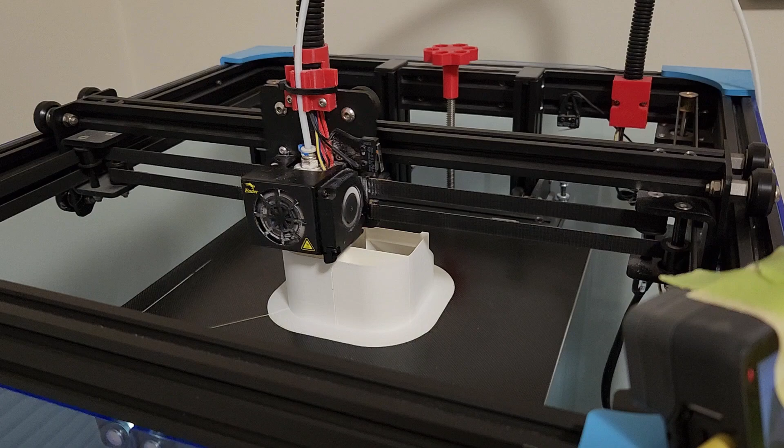Let's talk about surface mode and vase mode and how they work, and how you can use them to your advantage. In relation to the plane I'm currently building, my Ender 6 doesn't do surface mode because of the firmware on it, but I can still use it to get some good efficiency out of what I'm printing, and also to create strength in parts. I can also use it to avoid stringing.

What you find with vase mode is you don't get stringing, but you don't have to use vase mode to get rid of that stringing with lightweight PLA. And I'll show you why. Probably the easiest way to think about it is vase mode is like a slinky.

There's just one continuous print that has no stop and no end, so there's no Z seam on it. Basically, the printer starts in a spot, and as it's printing the item, it slowly goes up, so that when it gets to where it started, it's actually at the height to start the next layer. And it basically does that all the way through.

Now, that's great for a slinky or a vase, which is really nice and round, but how do we get some of that internal structure and things like that?

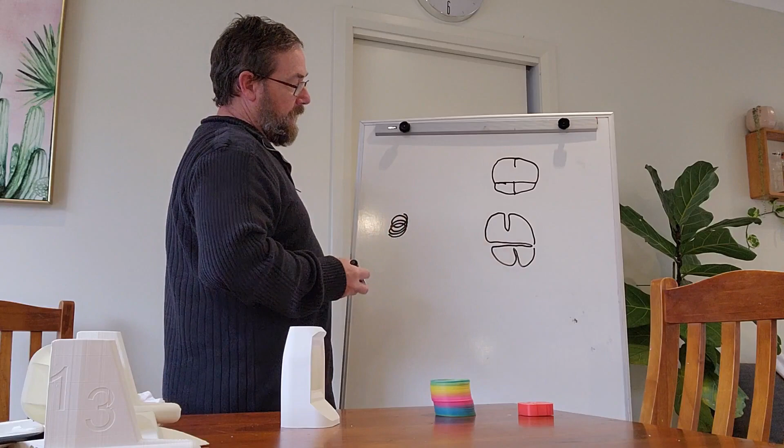Now you might say, well, how does vase mode do that? Because I can see that there are areas where, when the print head is running, at some point it's going to have to lift off and move to the other location. It's quite simple. Even though these bits look solid, even though it looks like one piece, it's not. It's actually two.

So when it's printed, it looks similar to this. When we talk about that vase mode where we're doing that continual slinky, that's basically how it's done. This piece here and that bit coming down, the bit coming up - terrible drawing by the way - there are actually two lines that aren't connected, and we use that to our advantage, so that what we end up with is that nice structure in the middle.

And even though in this print you can see, here's where I started and where I stopped, and at that point, if I'm doing vase mode, it will be high enough to start the next layer. This bit here, and this bit here, they don't actually touch the outer surface. And there's a reason for that - that's what makes it one single straight continuous line.

So another example would be if I was just basically to do a circle and I just wanted some structural integrity to it, I could do something like that. Once again, as you can see, it's a single line. And these bits here that are giving me my strength, they're two lines, but they're printed so close together that when they're printed, they come out as a single line.

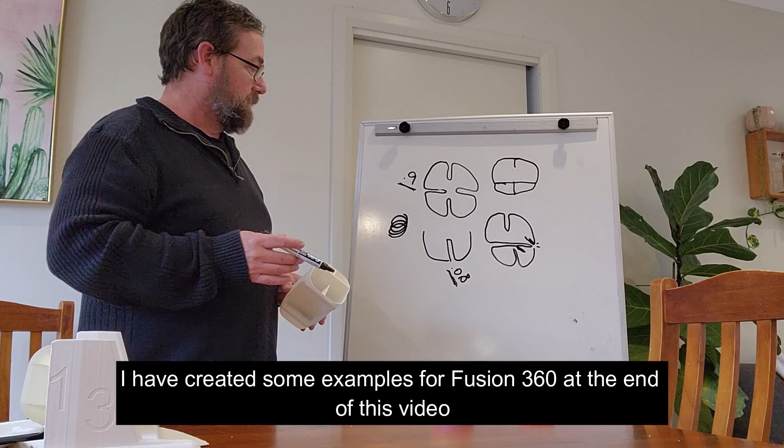Now I know what you're thinking. Why is it that when I print this line, even though it's two lines, it becomes a single line at 0.08, and where I have structures that are meeting each other, it's 0.9 and they basically join together? I don't know. It's one of the amazing things about 3D printing. Anyway, so there's a basic overview of how it works.

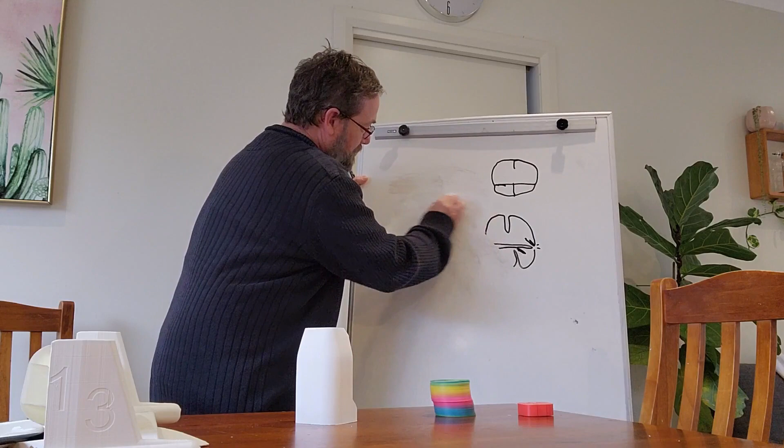And you might think, well, how do I do that? Some of this is quite simple, and when you start playing around with it, you'll come up with ideas. So what I generally do is I don't start off with trying to create a surface, because that'd be quite hard - straight away I'm talking about, in Fusion 360, creating a surface as opposed to creating a body. I don't try to create a surface because that would be really hard to do.

I could create a body and then remove those other surfaces, but I would still have had to go through the process I'm just about to show you to get these internal structures. So basically what I do, I'll make it a space.

Oh, that's rubbing off well. Yeah, anyway, second time's a charm.

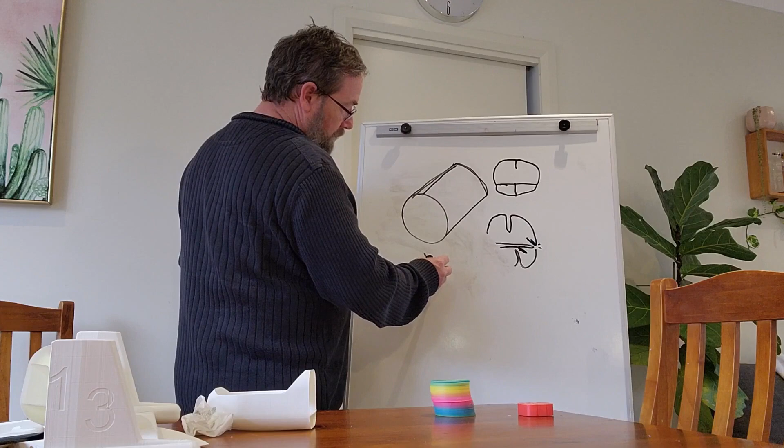So what I'll do is draw this in a three-dimensional view. I'll create a cylinder. So that's my cylinder - messed that up a bit, didn't I?

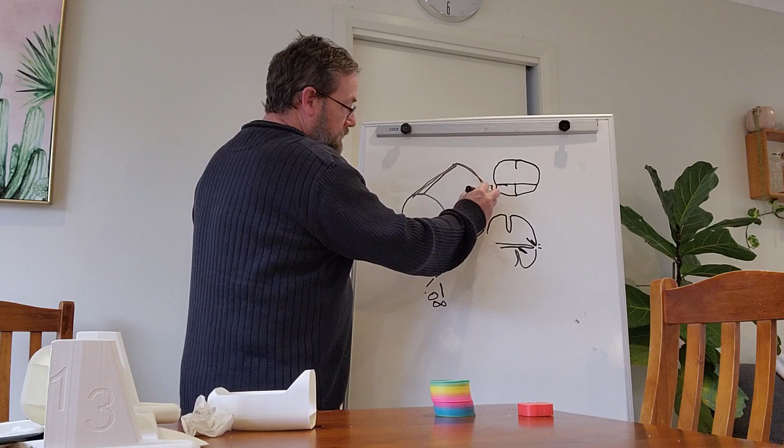Just like I did with this one, if I want to put something running through the center, I'll create another body that runs the full length since I want to cut the full length. I'll make it longer than the object because I'm going to split body it. The length and height are relative to how far I want to cut into the object, but I'll make it 0.08 thick.

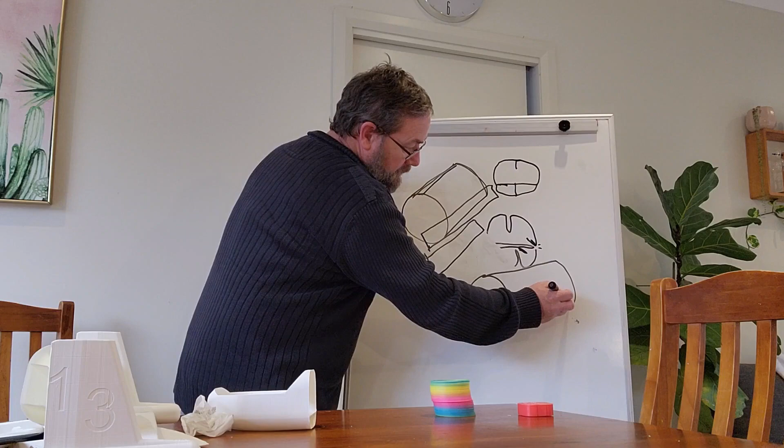So then I move this piece up into this piece so the two intersect, and then do a split body - the cylinder is the body to split, and this is my splitting tool. What I end up with is a cylinder, and if I draw the internal of it, it now has that cut all the way through.

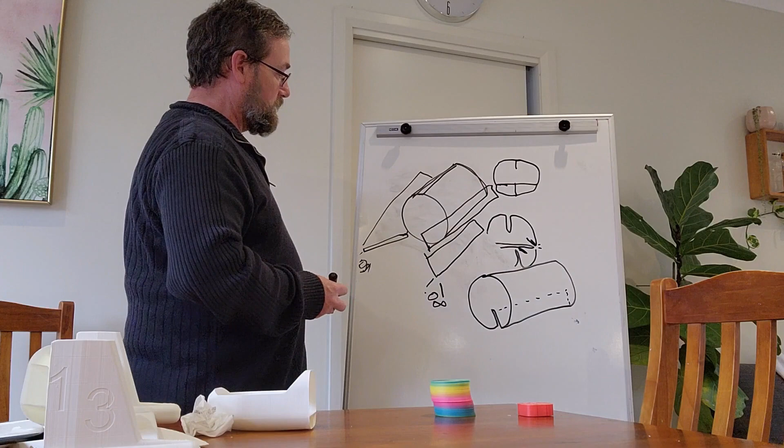So when you throw that into your slicer and slice it, then drag down through the layers, you'll see that it actually comes in, and you've now got that structure.

If I want to do what I did with the other one, where I had one coming across, I'd do the same thing. Once again, I'd create another body, as long as it needs to be, and 0.08 thick. Then I'd slide the body into this one so it comes all the way across over the top, because what I want to end up with is basically that.

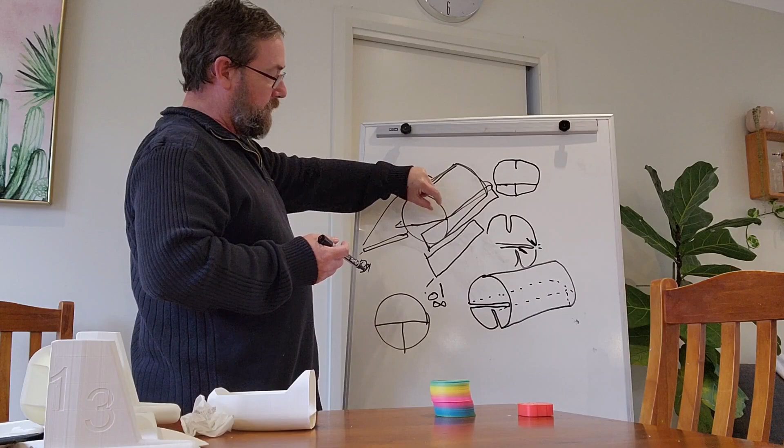So I would slide this in, and once again do my split body - this is my target, that's my tool. What I end up with, coming in from this side, would be that, and once again the internal view would look like that.

Now remember, when I slide this body in to split it, I need to make sure it doesn't go all the way through the body - otherwise I'll split it in half and end up with two. I want to leave a 0.09 mil gap from the end, so there's a 0.09 millimeter gap between this body and the outer of that body.

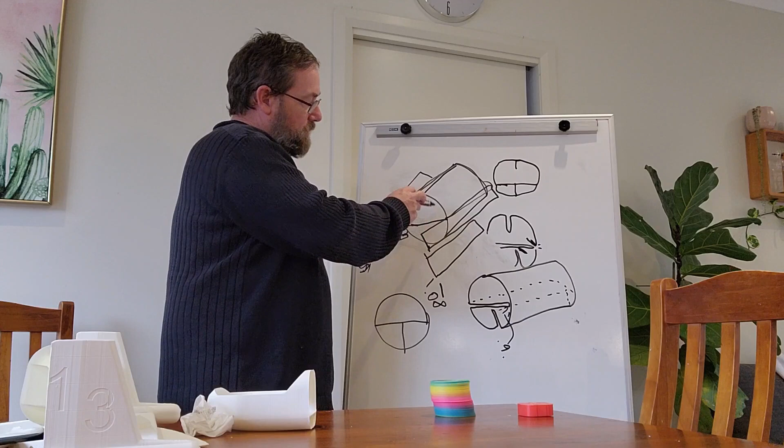If you play around with it, it becomes quite easy. Just start using your measuring tool and measure from a point on this to the other side. Eventually you'll sort it out.

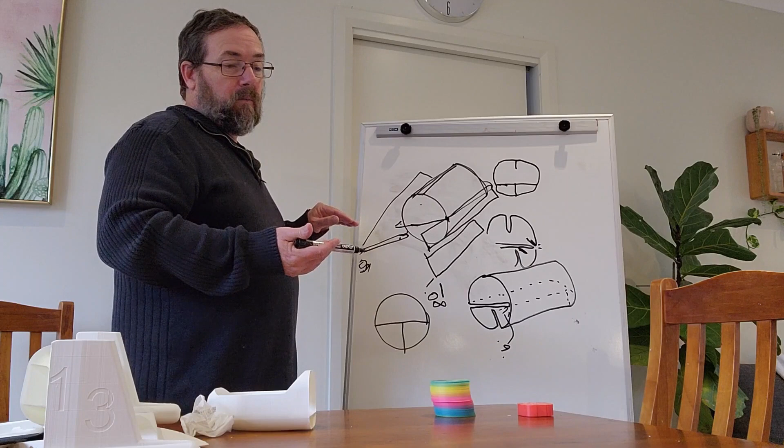One thing I found was that sometimes when you measure things, because you want this body to extrude past this face, the distance isn't actually relative to how far that line is from the outer circle. So on occasion, especially where I've got a line that isn't straight, I'll line up the edge of this with the edge of that.

Then I'll do a move - moving this back this way, and using the indicator in the move tool, it'll tell me how far away I am. I could also just punch in 0.09 to move it that far away. So there's a couple of ways to do it.

Anyway, have a bit of a play, have a bit of fun with it, and you'll find that you can actually create some really cool shapes. This is kind of the first time I did it.

And I did a couple of things. You can see I've done that bit there with the two join. I've got a couple of little bits down the back here which are going to help the motor mount. And there are a couple of spots where, and this is where you need to think ahead in your design, that's a big part about this, thinking ahead in your design.

There are a couple of spots where internally, so this piece is printed like that, there were some components that I didn't want to start until after. So rather than having a square edge on the end of it, which wouldn't print well, I put it on an angle.

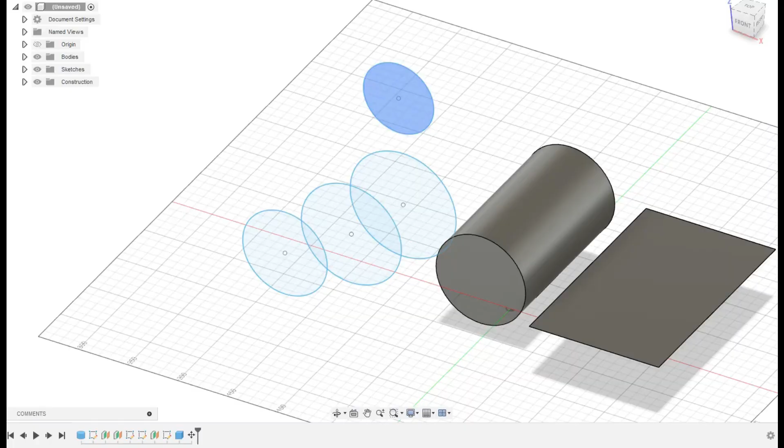A way to tell that you've got this right is that you're not getting a lot of stringing. If you're getting a lot of stringing, you haven't done it right. You should go back and look at your slicer, and your slicer will tell you what you're doing wrong. An easy way to check is turn off vase mode or surface mode, and you'll see more than one Z seam spot, one spot where it's jumping around, and that might be because the way you've designed it isn't quite compliant with the way it needs to work.

So what I mean is, it might get itself into a corner and have no other option but to lift and move to another spot to start again. So keep that in mind as well.

But you can tell straight away, because especially with the lightweight PLA, you'll just start getting a little bit of that stringing back and forth from somewhere. I know I got a little bit of that with my ailerons and stuff, but it was all internal, so to be honest, I really don't care.

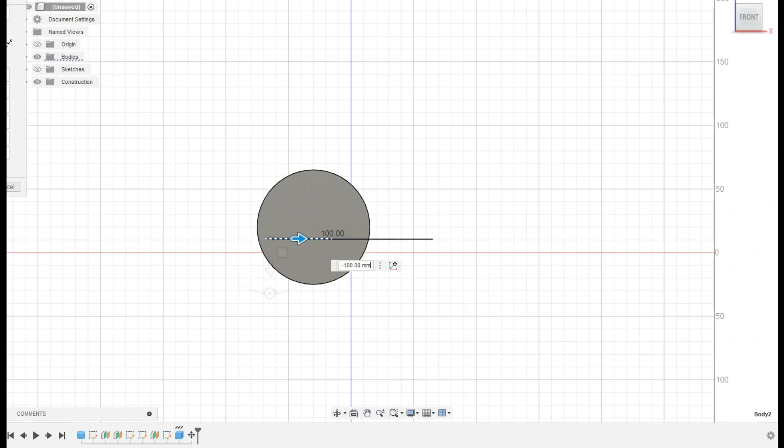Okay, so I've created myself a cylinder, let's just pretend that's a fuselage. Let's just get rid of these sketches for the moment. So let's just pretend that's my fuselage, and I've got my cutting piece here. As we can see with this cutting piece, it's very thin, so it's that 0.08 that I was talking about.

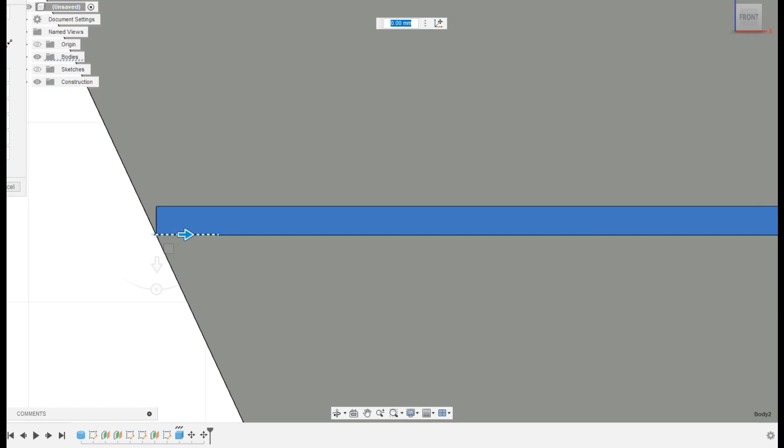And what I want to do is basically put a platform through this structure. So what I do is I just line it up nicely, and I'm going to move this guy, bring him down a little bit. And what I want to do, this is one way to do it, is line it up as close as I can to the edge.

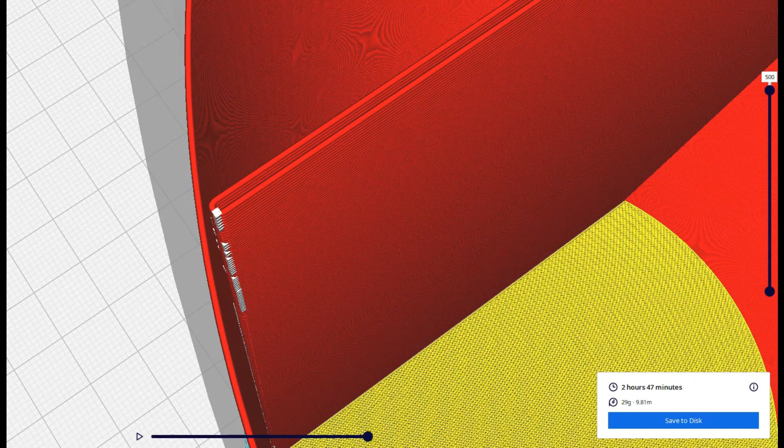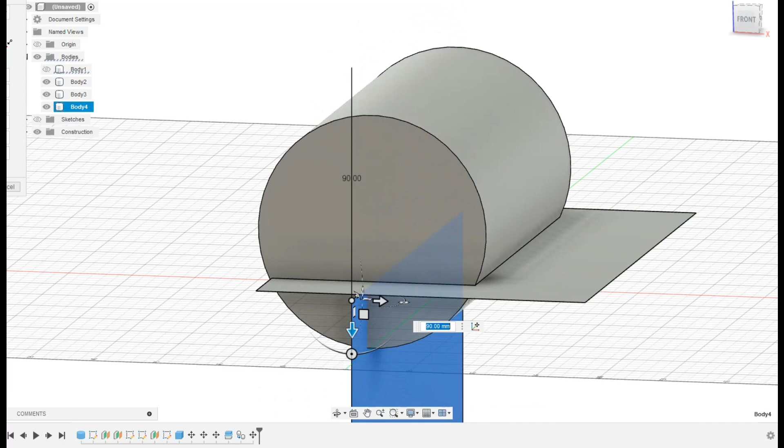Okay, so that's completed my move, and now I need to have a gap, and that gap needs to be that 0.9 I was talking about. So let's do another move on the same object, and I'm going to move it that 0.9. There's a couple ways I can do it - I can just drag it till it gets there, or I can just enter it once I know which axis it's on. So there we go. Now I've got this bit of a gap here, and you can see it doesn't come through the other side, so that's pretty cool.

All I'm going to do now is a split body. So this is my body to split, and what I normally do - I've seen some weird issues sometimes where when I select something, it's selecting the face and not the actual body. So what I normally do is expand my bodies, work out which body it is, so it's body 3. My splitting tool is body 4, so it's selected the whole body and not just the face, and then I just OK that.

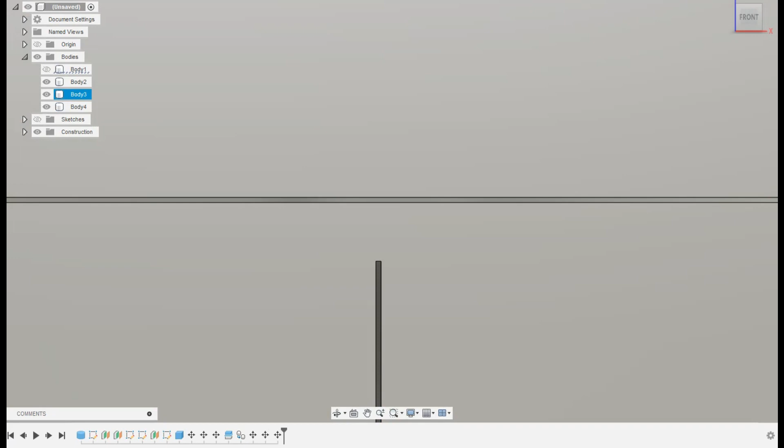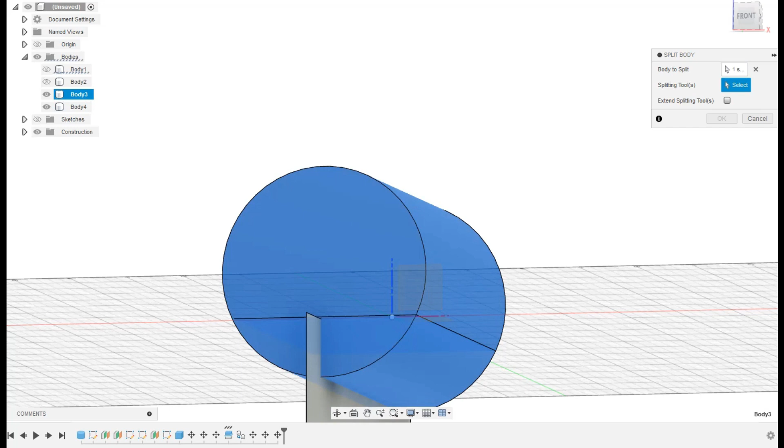If I just hide this guy, you can see that I've now split that, and that's this guy here. So if I get rid of that little sliver, you can now see that I've actually cut all the way across that. So if I just throw this out to print, this guy, okay.

Okay, so when we look at our preview - I don't know if I put, yeah this one's got top layers - and we slide down through it, what we can see is that it's not touching this side, but when it prints that, it'll print close enough that those sides will actually be joined, and on this side we actually have, as you can see, we've got the gap.

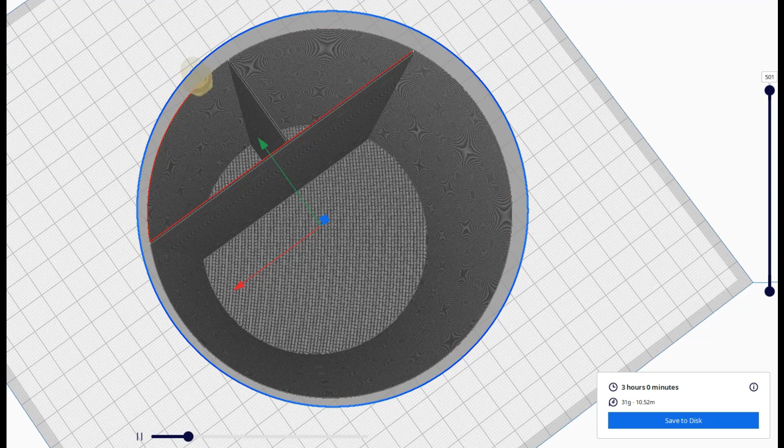Righto, let's jump back here. Let's turn on my slicing object. So if I wanted to come up from the bottom, I can just use the exact same object. So if I select this guy, I could actually even just take a copy of him and just move him down a bit. And obviously I want to rotate him because it's on a different plane. Just going to leave him there for a sec. I'm just going to grab him from the top, make it a bit easier.

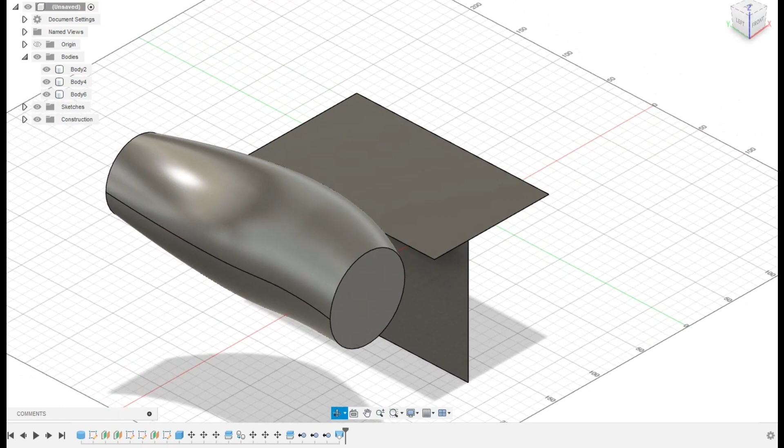So once again, I do pretty much exactly the same thing. What I want is I need this guy to be that 0.9 away from the other guy. So if I line this up, so he's basically touching him. I don't know if I'm in the center of the object or not, doesn't really matter for this demonstration. It's pretty close. So if I line him up like that, so he's pretty much spot on, and then I do another move just to move at that 0.9. It's zoomed in pretty close, so I'll just drop a 9 in there, and he's now that 0.9 away.

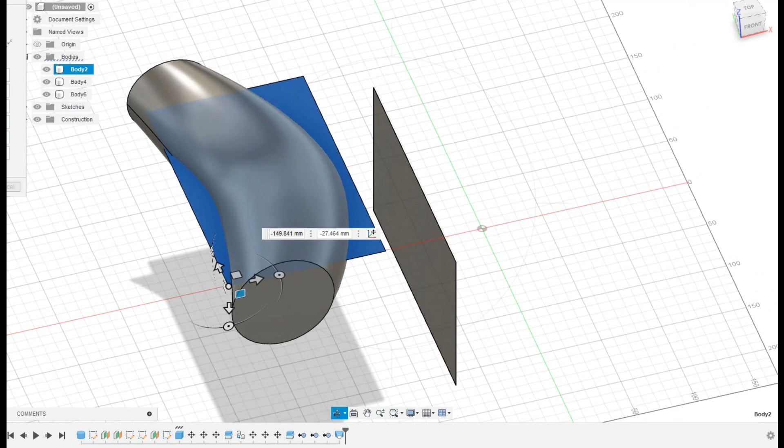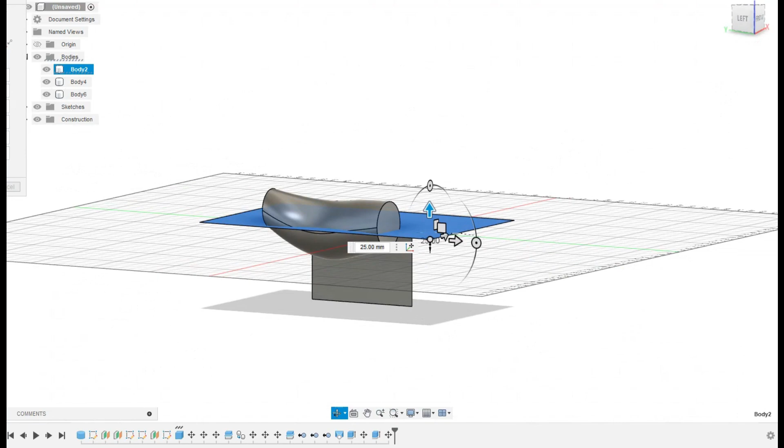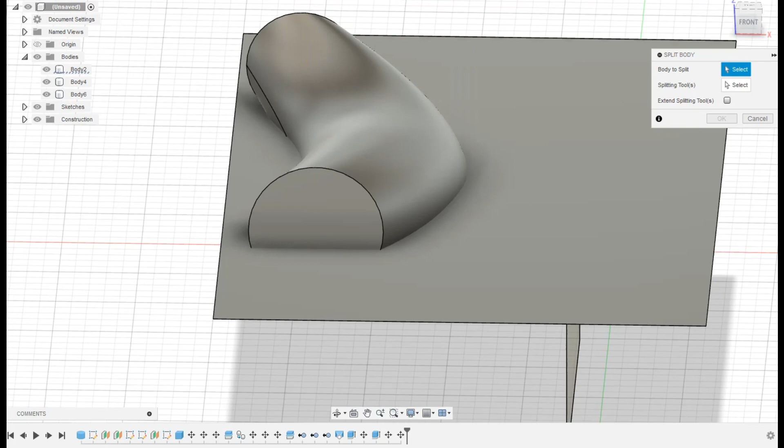So let's save this guy out. Right, so once again, we've got the gap down the bottom, but it doesn't actually touch here. It's close, but not quite. And when we look at it, and we check how it's going to print that, you'll notice that it conforms with what we need for vase mode, because it's just one single continuous line throughout the whole of the layer, and therefore you can print in vase mode or surface mode. One of the benefits of that is that you won't have that Z-seam.

You also won't get stringing, so see that it started from the same place it left off. And if I go up or down a couple of layers, doesn't make any difference, because it's pretty much the same object shape all the way up. So yeah, if it does it on one layer, it's going to do it on all of them.

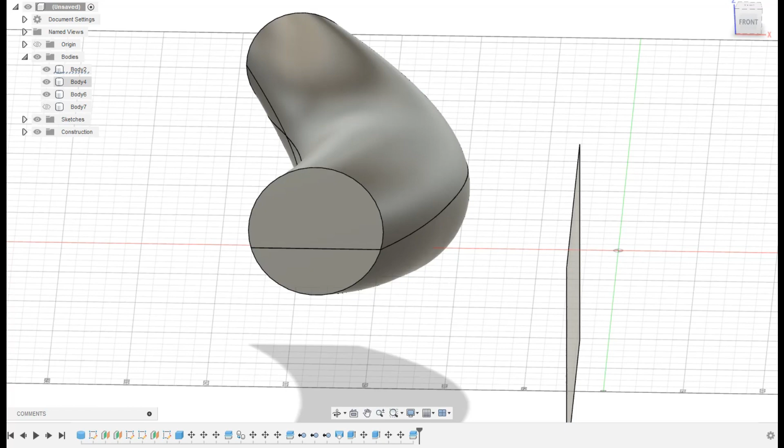Okay, so I'm going to try slicing something which doesn't have a uniform shape like the last one, because that had a uniform shape, it was really easy to do. You know, it was all perfectly symmetrical, so I could just jam the wedge in there like I did and cut it, and I know that it's aligned front to rear of the object, so that's not a problem.

So let's turn these sketches back on, and what I'm going to do is I'm just going to loft that so that we have a really unusual looking shape, which, using a rectangular piece is obviously going to cut all the way through it if I try and put that through.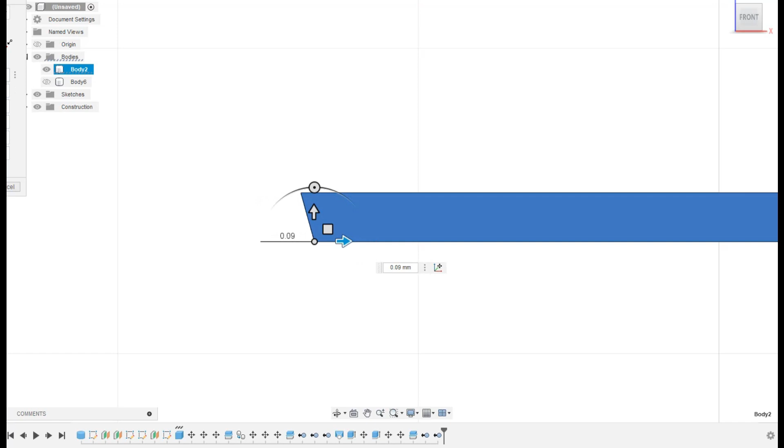And what I mean by that is if I grab this guy and I put him into the object, he is going to come out in some places, but not others, so the distance is unequal. So what I want to do is extend that object for starters so that it goes the full length of this object. So let's just pull him out.

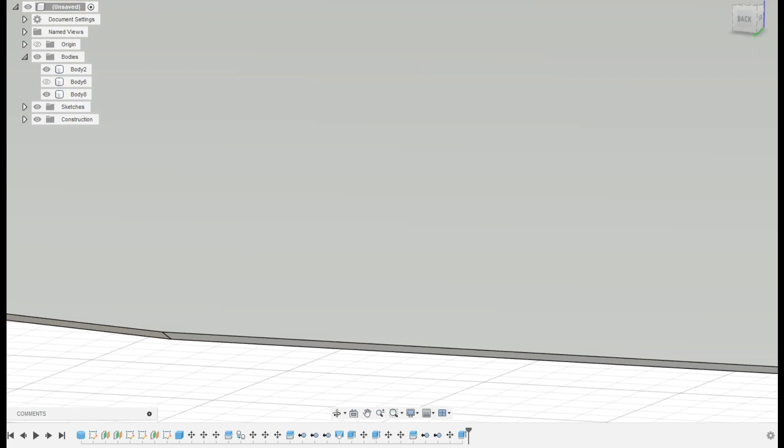Just cancel that. I'm going to zoom in on him, and I'm going to see if I can extrude this edge. Sometimes it works, sometimes it doesn't. Yep, cool, he's happy for me to do that. Extrude can really play up sometimes.

So I'm going to do basically the same thing, but on this edge if it lets me as well. Yeah, cool. So I'm going to pull that out a bit. I always end up doing more than I think I need because it just makes it easier. Means I don't have to do it twice.

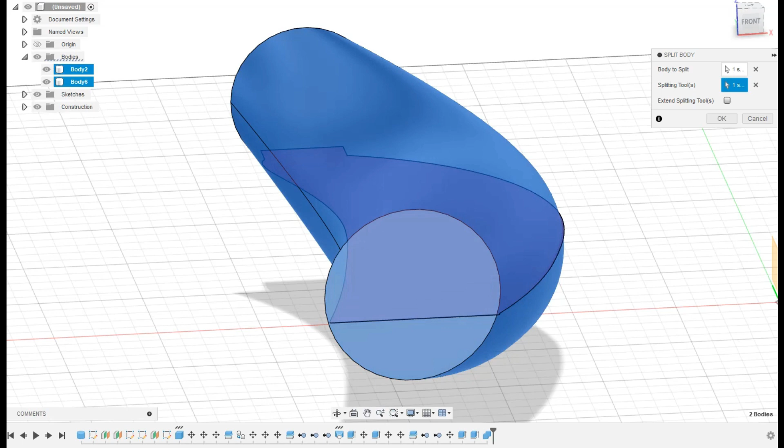Righto, so we've got this really big cutting surface now. So let's just go back to that top view again. And what I want to do is move this object into that object like I'm going to cut it. But as you can see, just because it isn't a uniform shape, it's just not going to work.

So what I need to do, let's just jump around to the front. Might just bring that up a little bit just so it's... Let's have a look at that. How's that look? Yeah, it's going to be more uniform in there.

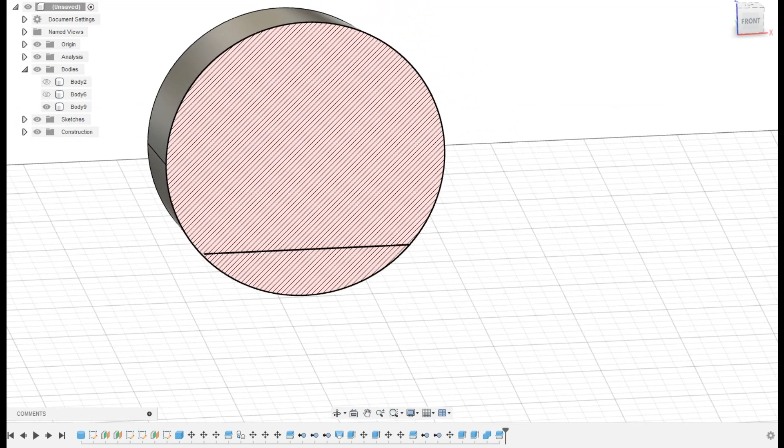So the question is, how can we get this to work? Well, I think it's quite easy. We'll give it a crack. So what I'm going to do is, the first thing I'm going to do is I'm going to do a split body.

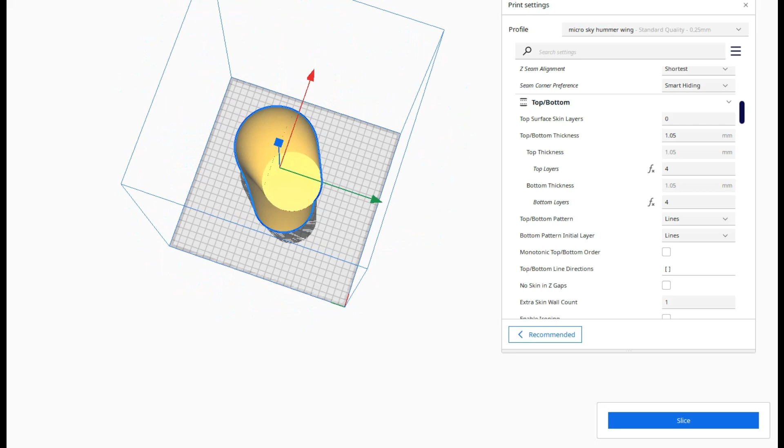So the body to split is actually my plane this time around. So body 2, and my splitting tool is going to be body 6. Okay, so when I do that, I'm going to end up with a couple of pieces.

So now I've got the outside piece, this piece, and there's an inside piece that you can't see at the moment. So if we get rid of that, see this piece here? So let's hide this guy because I don't need him anymore. So I've got that guy and I want this guy.

And as you can see, that line runs perfectly down the edge there. So what I want to do, I'm going to get rid of this guy as well, so I don't need him at the moment. So I've got this guy and that guy.

Get rid of that guy. I just want to clean it up a bit so we know exactly what we've got and what we don't. Alright, cool. So I'm going to come to the front and I am going to just hide this object for a second. And what I want to do is exactly the same as what I've been doing with everything else.

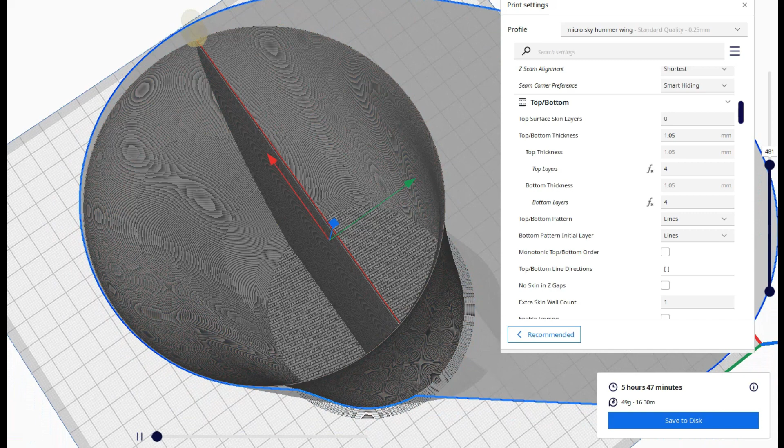Look at that, it's even giving me a nice little chamfer on the edge. So I'm going to select this guy to move him, and I'm going to move him by 0.09. Okay, so I've moved him 0.09 to the right.

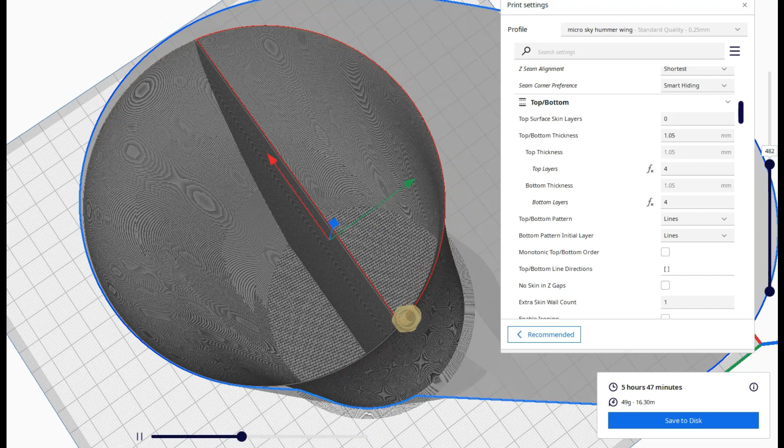So when I turn my other body on, he is no longer protruding out the left-hand side. But he is on the right.

Now, one other thing that I'm going to do, just to make sure that this works correctly, is I am going to see if I can extrude this edge, because I want to make sure that it extends past. Yeah, you got a little bit of angle on there, but yeah, that'll work.

It's both sides. Yeah, you can see over here, it's not really poking out. It's pretty close.

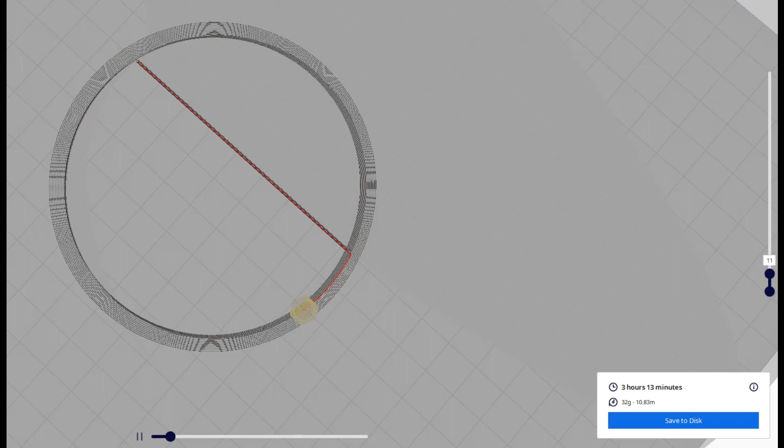I'm just going to make that a new body for a second. Yeah, there you go. Now that I've done that, it's happier. So let's just get rid of this guy for a sec.

And I want to do the same here. I just want to extrude this edge, which is extruding the way it was cut along that face. That's why it doesn't look parallel, but yeah. So I'm going to join that. I'm just going to...

So I didn't actually join this one, but I will now. I'm just going to do a combine between this guy and that guy.

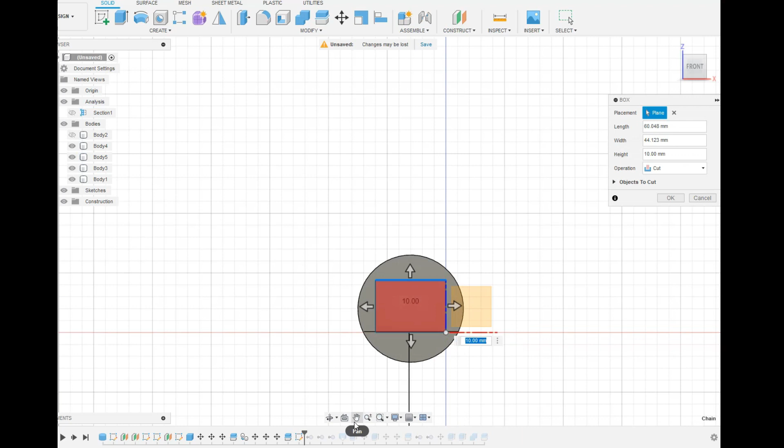So they're cool. Now when I look at it, it's sticking out one end, one side, and the other end. So if I come and do a split body on this, I'm basically going to end up with the exact same scenario as before, even though it's not a straight line, because I've made the line match what the actual object was.

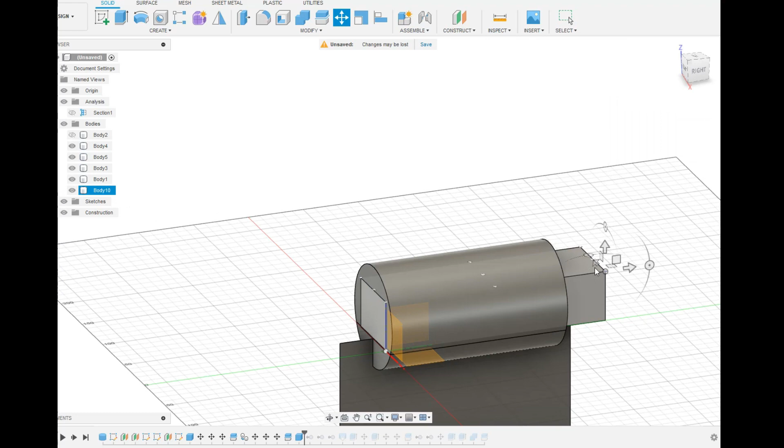Who is who in the zoo? That's cool. So we've now got that slice all the way through it.

So another way you can actually look at this sort of stuff is if you come down to your select section analysis and you click on a face, and then you can drag the arrow through the body, and it'll actually show you the internal structure. As you can see, it maintains that distance from here to there.

If you've ever done an analysis and clicked off and gone, hold on a second, I've just lost all my drawing and stuff because I left the cursor partway through, you can actually just come up to the analysis section and turn that analysis off.

So I now get to see everything that was going on. I'll do the same with this one. I will just throw it in the slicer.

As you can see, it's a fairly simple task to do. It does require, though, often that you think ahead a bit.

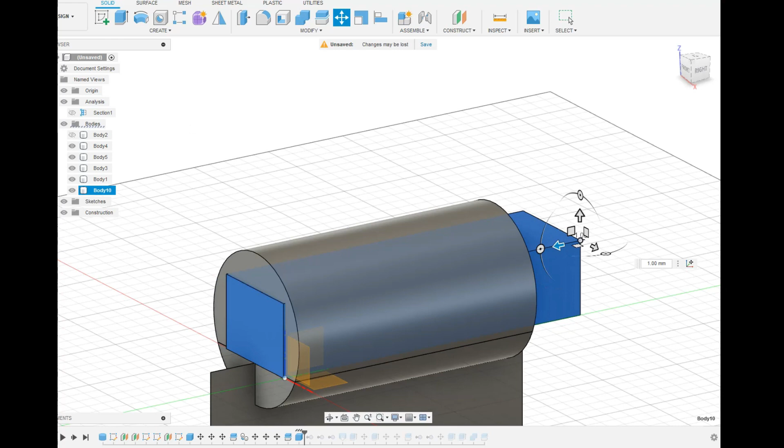And I prefer this method to using a surface as opposed to a body, because I can go back and fix mistakes in this quite easily.

If I'm going to try and create a surface in a similar fashion, I'm going to have to draw those lines out. I'm going to need to make sure that the gaps are right, and the issue becomes that all of a sudden I'm concentrating more on getting that internal structure right as opposed to the outer shape that I'm trying to create, because I need to think about everything well in advance.

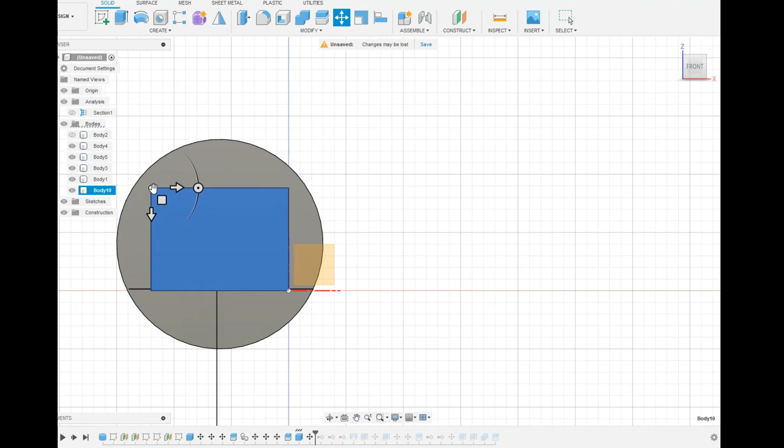As opposed to just thinking about it beforehand, you can normally just make a general shape like I did, and once you're happy with your shape, you can then just do your cuts in that shape, and then you end up with something like this guy.

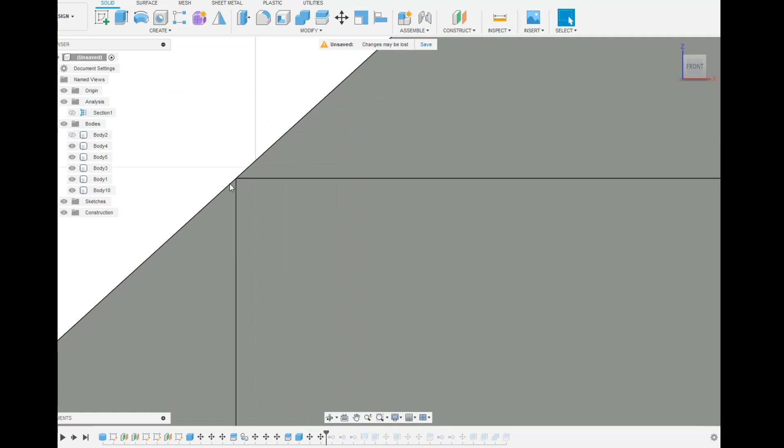So once again, if we just drag down through that, we can see that he is not touching on this side. There's a Z-seam there. And we can see on the other side that it's open.

So once again, if we just run our print layer preview, it'll just run around and have a bit of a look. And yeah, as you can see, it's good to go.

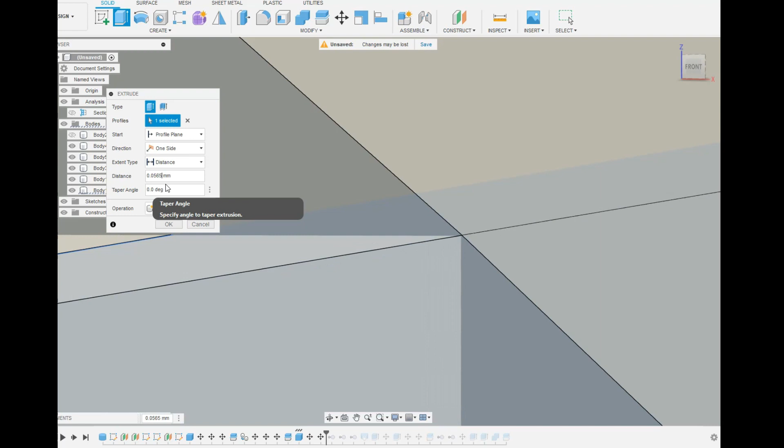So I've just thrown the object back into Cura and resliced it without top or bottom layers. One distinct difference that you'll notice is that I no longer have that second wall, which you wouldn't have if you're doing vase mode.

And as you can see, if we just do our print preview, it's really straightforward. I think one thing worth mentioning is that there isn't a lot of structural support in this. There is a bit across that section where it travels all the way across, and it'll be really strong through there, but it won't be strong in other areas.

So this is kind of where you need to think, well, what can I do to make it more structurally sound using this type of method? So there's a few things that can be done.

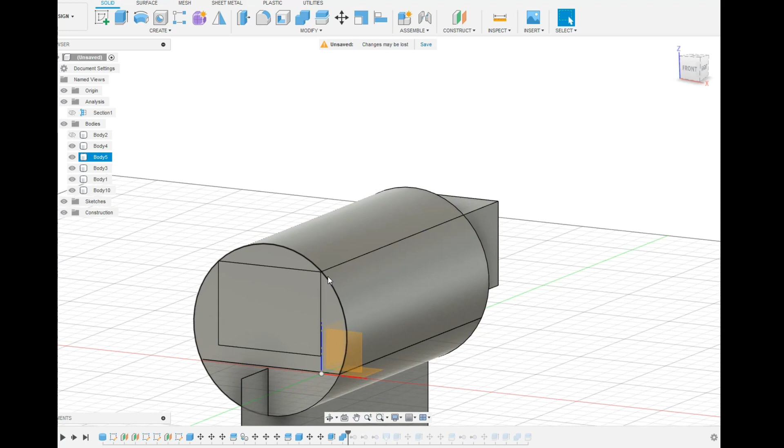Let's just stop that. And if we just scroll up through that, as you can see, it's got a nice uniform distance, and at no point does it actually touch.

So I'll throw that on the printer and I'll print that out as well, and I'll show you what that looks like afterwards.

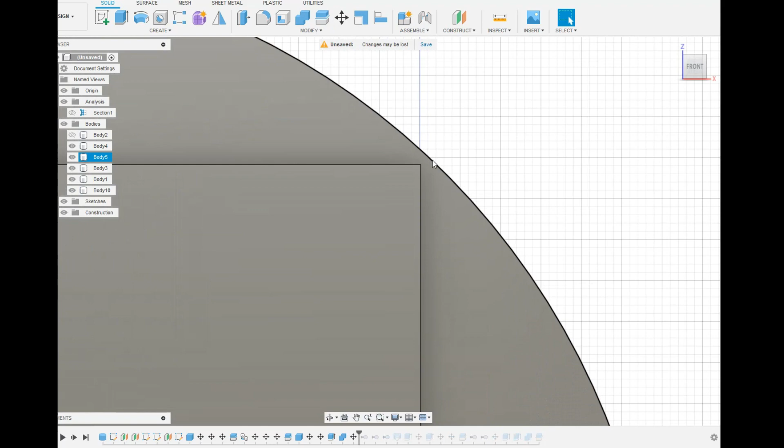Okay, I'm just going to roll back to the other object that we created. And what I want to do is I want to create something that's a little bit more structural. Like at the moment, this isn't too bad.

It creates some really nice solid areas to the base here, but up the top it's still very soft, remembering that this is thin wall print.

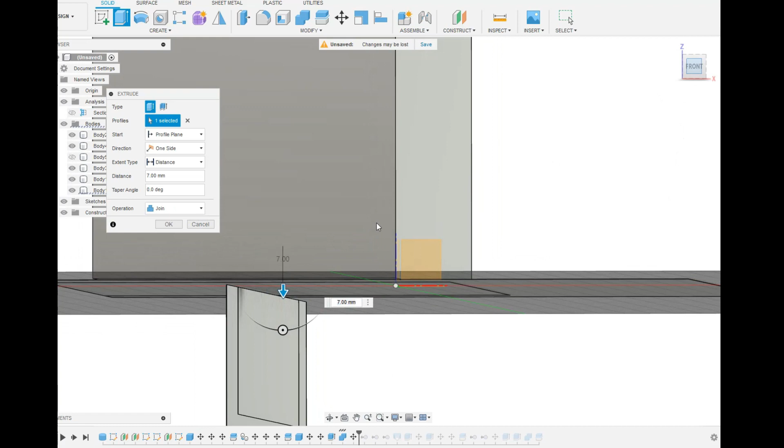So what I'm going to do, I'm going to start by creating a box, and I want it on this plane, and I want it to basically fit inside the existing. Got a bit of snap to going on there.

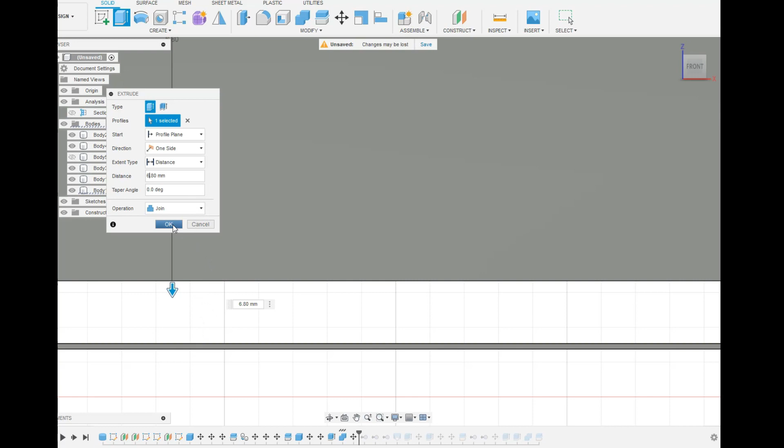I want to create a new body because I don't want to cut it yet. And I want that to run. I'm going to make it full length.

Okay, so I have my new body, and I just want to cancel that for a sec.

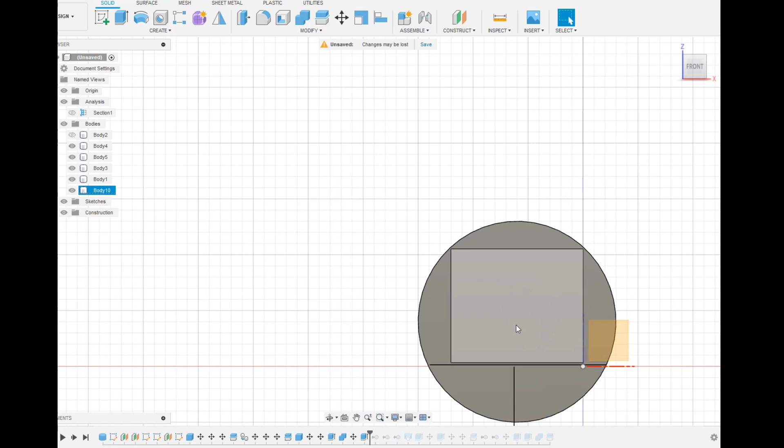So I've got my new body, and basically what I want to do is create an area whereby this body provides an internal compartment, but I want to do it the same method that I did those other things.

So it sounds like it could be quite tricky, but what we'll do is we'll just center it up, and then we will take care of the harder bit, which is just going to be aligning it so that we've got that 0.9mm gap to everything. And then I'm basically going to add one of these wedges on top of it so that it slices through the top of the structure. You'll see what I mean in a minute.

It sounds kind of complex. You can make it harder than it needs to be. I'm going to try to make it fairly simple, but we'll see how we go.

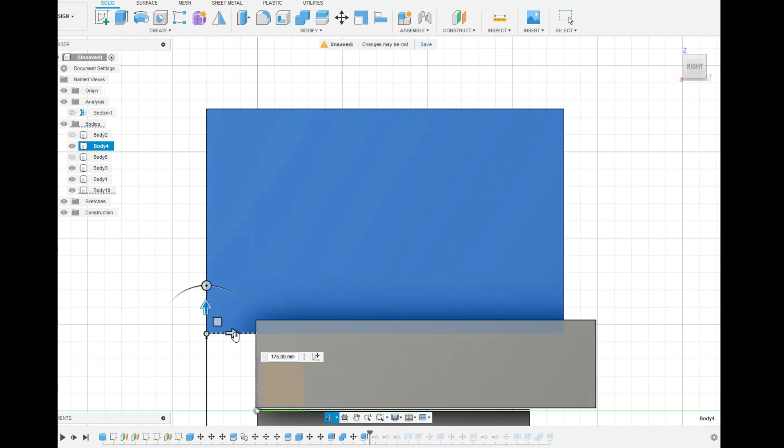Okay, so the first thing I want to do is pull that body all the way through. I'm just going to move it forward a bit because it's not quite protruding all the way through, and that will probably make it a bit easier to see what's going on. I just want 1 mil, I just want it to be coming through.

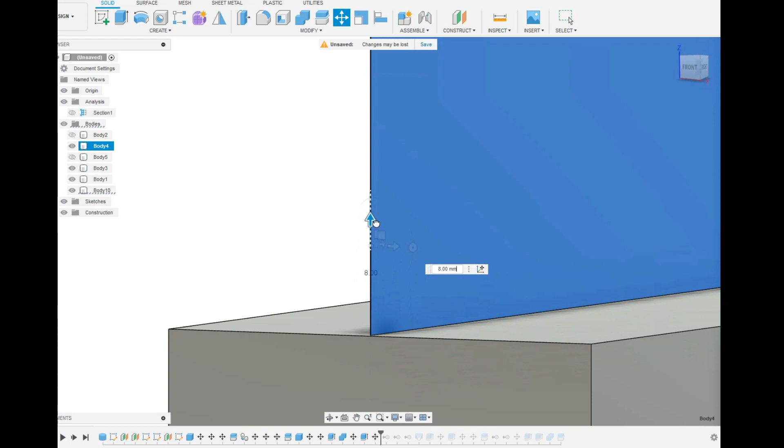Oh, I hate that. Righto, so let's just get a front-on view. So what I want to do is align—let's do another move.

Body to move is this guy. I want to align him at the top corners. And that was a massive fail.

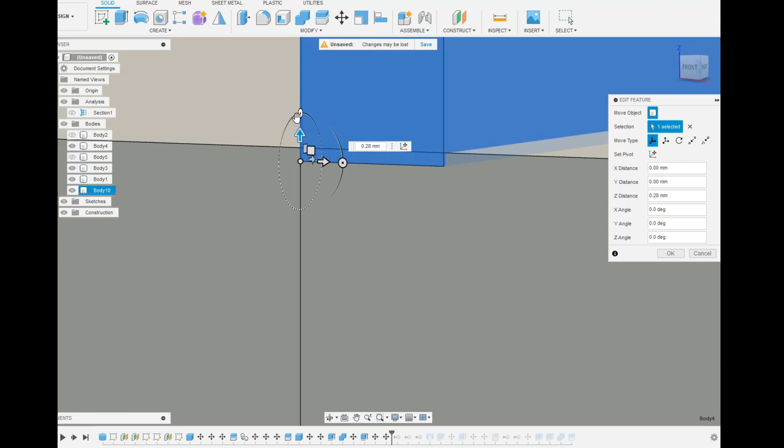Scroll around a bit. So I'm just going to line up one side and then I'm going to see what it's like on the other, because from what I can tell—this will all make sense in a minute.

Okay, yeah, that's pretty good. And if I come look at the other side, ooh, I'm out just a little bit.

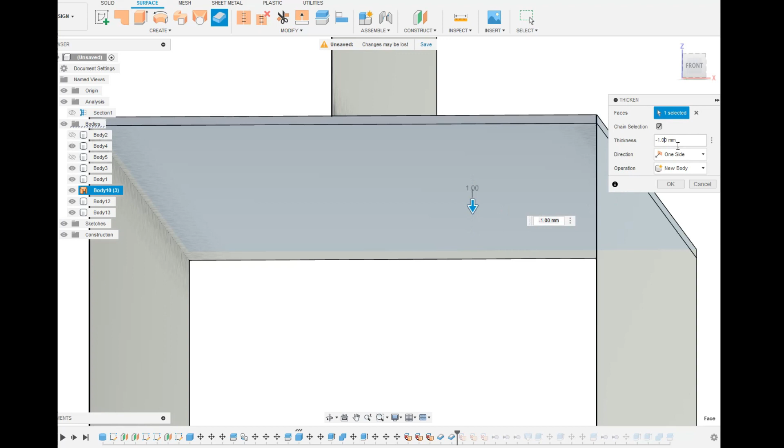So what I want to do is extrude this side rather than move it, because as soon as I start moving it, I'll be pushing and pulling and mess up the other side, which is pretty close. So if I just do an extrude on this side and bring it out to the line, and I want to go a new body so that I'm not...

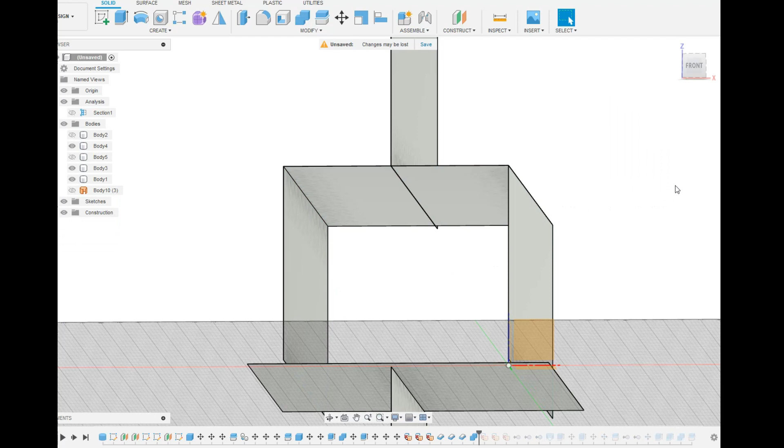What's that distance? That's 0.5. Let's go 0.55. Oh, it's close. 6, 7. Let's go 6, 5. Yep, that looks pretty good. Okay, so that's a new body.

I'll need to join the two bodies at some point, but that's looking pretty good. If I just jump back over to the other side—yeah, yeah, that one's looking pretty good. I don't think I'm going to get it much better than that, eyeballing it.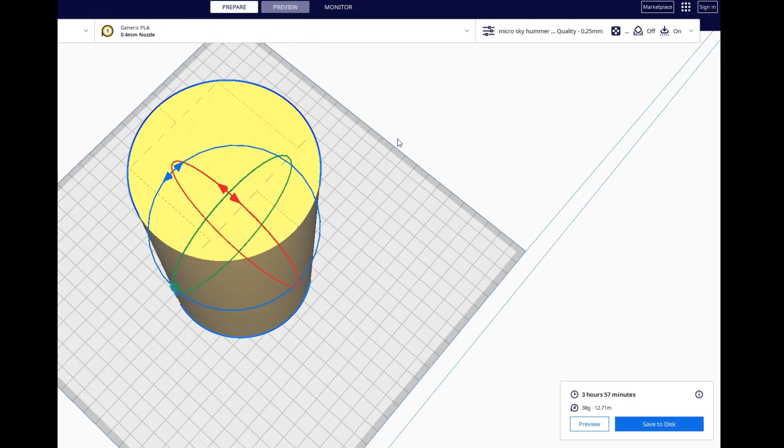Okay, so the top two sides are aligned fairly well, so I'm happy with that. And I just need to join these other components.

So if I just hide this guy, and I just want to combine this guy and this guy, good to go. There are no other objects around that I'm cutting into or anything crazy.

Alright, I'm going to turn that body back on. Now, what I want to do is move this box down that 0.9, so that gives me the 0.9 gap at the top. It may not be perfectly 0.9, but it will be close enough.

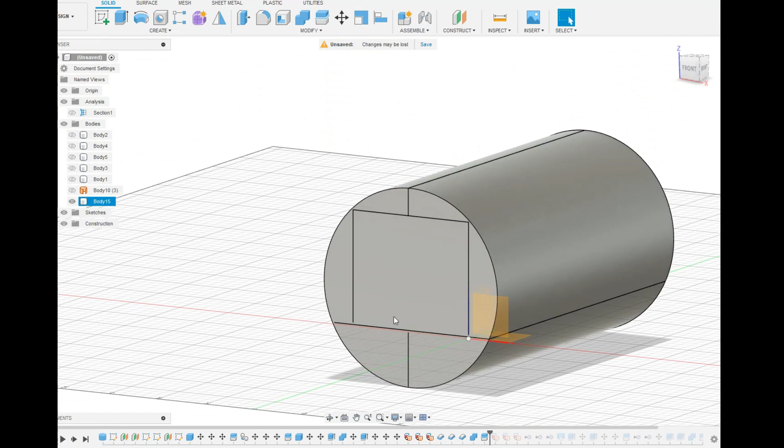Let's probably go a mil. So that's 0.2, that's 2, sorry, so I want to go 0.9. So that's now 0.9. And if I have a look, I can see that there is a gap there.

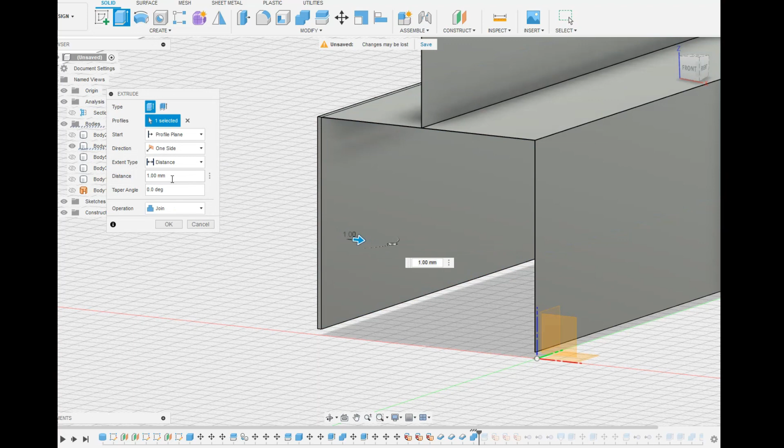So that's cool. But now, what I now need to do is get this within 0.9 of the line below it. So I'm going to do basically the same thing.

I'm going to extrude the bottom of that until it is literally touching that other body. Is this guy? Yeah, it's what I was hoping for. So there's the one that I cut it with earlier. So what I want to do is hide that guy, and extrude it down to that other line. So let's go extrude this guy.

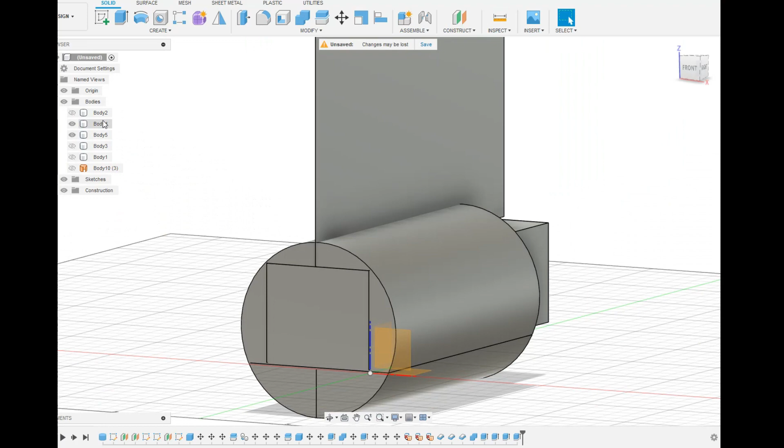Now what I can do is extrude it to the line, and then if I minus 0.9 off that, so that'd be 6.8. So now I have my 0.9 gap.

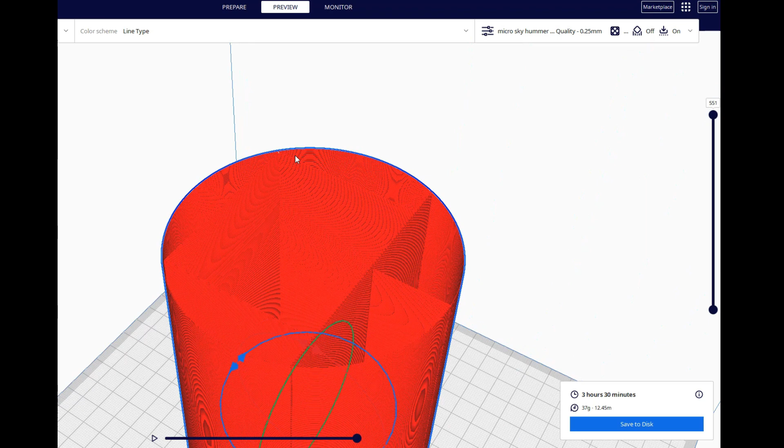Okay, join. So I bring my other body back in. As you can see, those gaps all look roughly about the same, all around about that 0.9. Get rid of that other body so we can't see it anymore.

And what that should do is when I print it, they will actually join together. I'll show you those other pieces if I haven't already. So now the only issue is that this is just a block in the middle of nowhere. If I try and print that at the moment, even if I hollowed it out, I'm just going to create a whole stack of stringing.

So there's a couple of things I want to do. The first is I'm going to turn this into a surface. And then I'm going to thicken it so it becomes a body. You'll see why I'm doing that in a second.

The other thing I need to do is grab body 4 and move body 4.

I kind of align it with this square, and I'm basically going to join the two up. Righto, that looks pretty good.

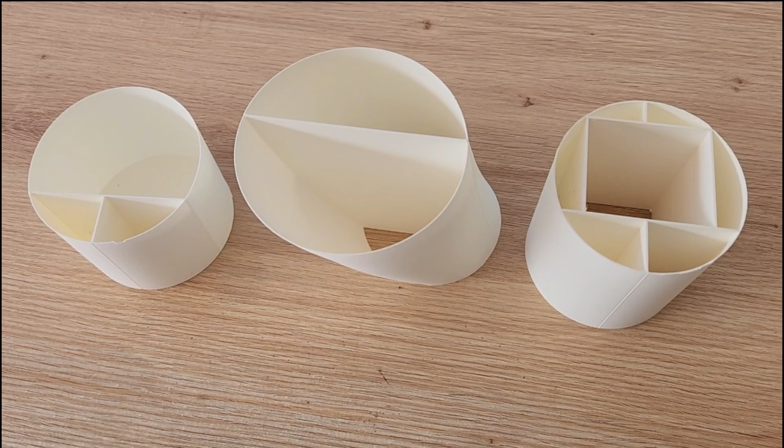So I'm not going to join them yet because it's a little bit early. I should probably look to also move this guy up a bit.

So I want this body to be approximately 0.08 inside that body. Okay, so what I want to do is turn this into a surface. I'm just going to delete a couple of those, and then I want to thicken it, but I want to thicken it in an internal direction. Okay, cool, and I want that to be 0.08.

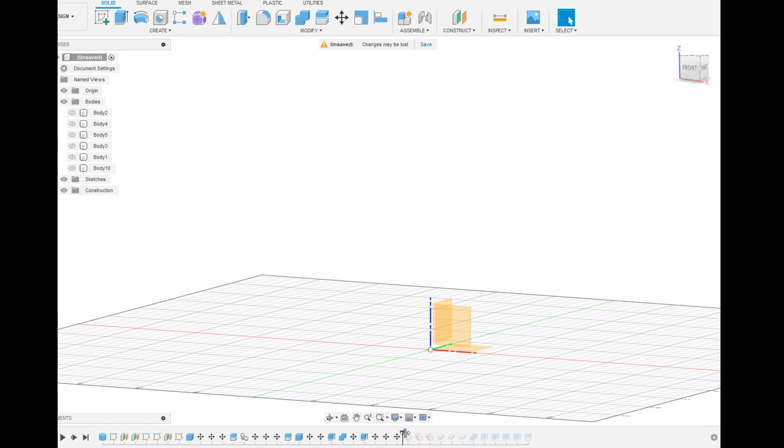And you'll find out why in a second. It's going to be quite important, because keeping in line with what we're trying to do by creating those 0.08 cuts through the object, that's where it becomes very important. By doing that, it means that we'll end up with those really thin cuts, and when we slice it, you'll see that I've got that single track which is suitable for vase mode again.

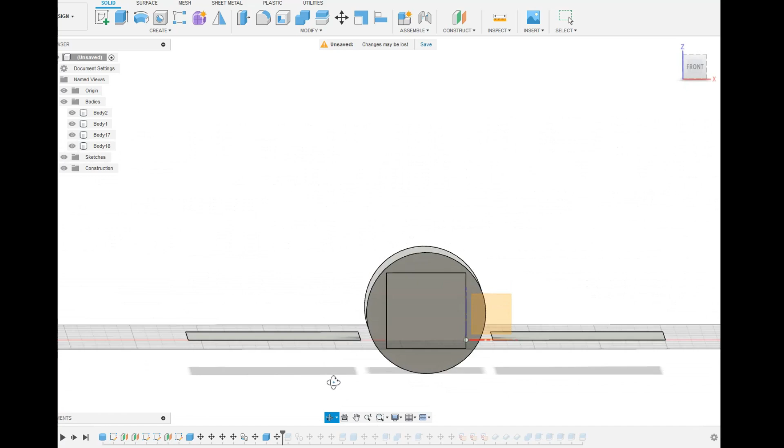How far through is this sticking? So that looks good, that looks good. So that's all aligned quite well.

So what I want to do now is come back to solids, and I want to combine this guy, that guy, that guy, and this guy. Okay, so that's now body 4.

Must be body there, let's just get rid of body 1 because we don't need that anymore. Where's this guy? Body 3. Let's get rid of body 3. So there we go, there's my body 5.

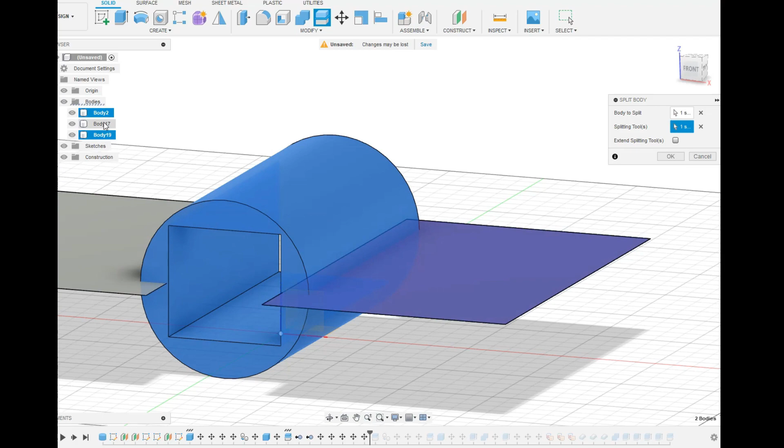So you can see what's going to happen now. All of a sudden what we have is the print will start in this corner, it'll come out to this line, it'll start moving up this way, and then it's going to follow this track around. And then it's going to come back out, come around, do this guy, and back to the beginning. So we'll end up with that vase mode type effect, and it'll get rid of any stringing.

And this is obviously a little bit easier than that other object we were looking at, because it is cylindrical and there's no deviation there to shape. It makes it a lot easier. There are other ways of doing it where you can do something similar to what I did before.

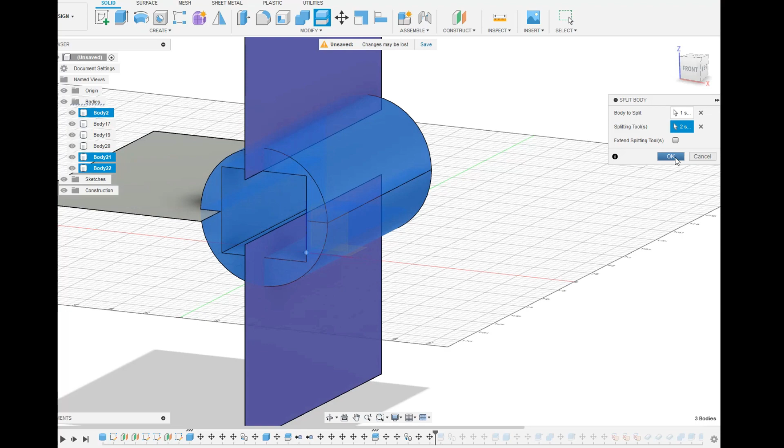So what I'm going to do now is a split body. My body to split is body 5. My splitting tool is body 4.

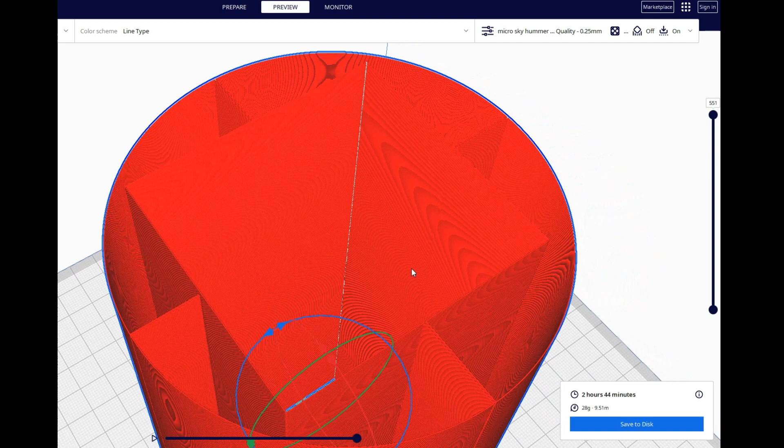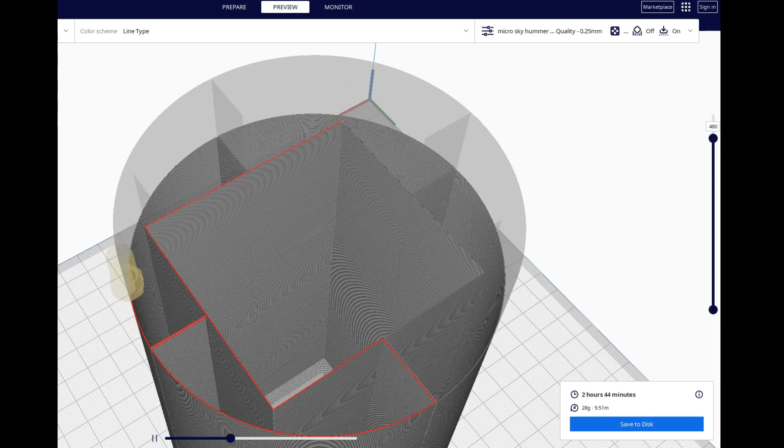So if we now cancel our section analysis, and jump over to preview, so I've removed tops and bottoms, you can see yeah, it looks like one of the parts hasn't done properly.

So it looks like what's happened is this is actually touching the outer wall. It's touching the outer wall in both locations, and therefore when it comes along it's drawing down.